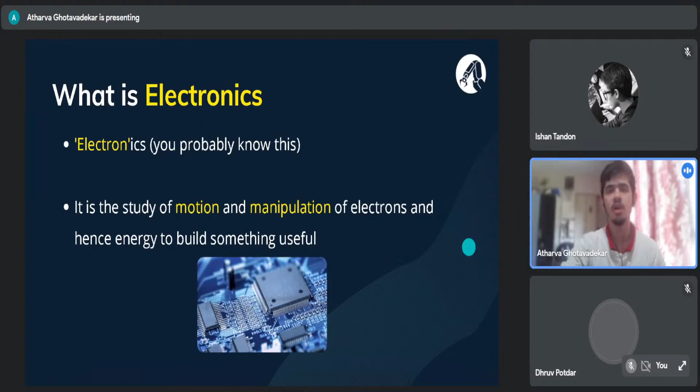Now an even more important question: why does it matter? Why do we care about electronics, or why is everyone talking about it? There are two main reasons I feel. The first is that a lot of the energy we use today is in the form of electricity. A few thousand years ago, when there was no electricity available to man, things were more mechanical. Systems were based on mechanisms, and energy sources might have been fire, or even animals or labor. But in today's world, the major source of energy is electricity, and in order to manipulate and use that in a good way, you need to have an understanding of electronics.

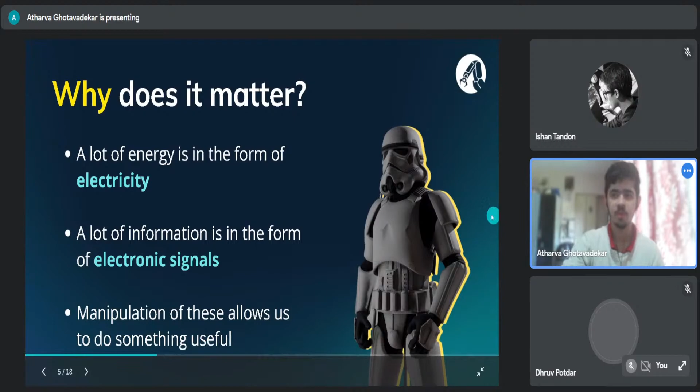Similarly, we are living in the age of the internet, in what we call the digital age, because most of our information, most of our data, is in the form of some or the other electronic signals. When things are stored in your computer, in your memory, that is nothing but variations in signals that we have given meaning to, and we interpret them as whatever information we want. So these are the two main reasons why electronics really matters in today's world, and that's why studying it and getting into it will help you build something useful. It's important to think about that as you approach this, because if you know why you're doing something, you're much more likely to be interested, and it's going to be a much easier ride for you.

Okay, so we'll start with a very small, basic example. You don't need to know the details about all of this. We'll just go through it to understand what levels electronics is involved in.

Let's say you have a temperature sensor based heater, a mechanism where you want to maintain the temperature of your room. For that you need two things. First, something that will measure the temperature, because you want to maintain it at a certain level. Second, a mechanism that can give an input to the environment such that the temperature can be varied, something that will heat up or cool down the environment.

As you can see in this diagram, you'll take in an input from the environment in the form of heat transfer, because whenever there's a gradient of temperature, there's a flow of heat across it. So there'll be heat transfer into a sensor, which tells you what the ambient temperature is. Then you feed that information into a circuit, process it using some technique, and that processed information gives you an output, which is what you need by reading the temperature, since you want to maintain it at a certain level.

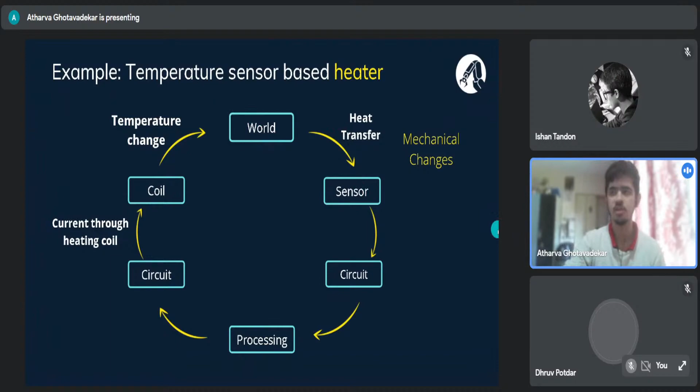Let's look at this in more detail. Let's think about what this sensor might be doing. You have a change in temperature, and there's going to be some mechanical change in the sensor, for example a change in resistance. I'm making this example based on what you've learned in 11th and 12th, so it's not too complicated. Real sensors might not work exactly this way, but this is just to give you an idea of the thinking approach.

There will be a change in resistance due to an increase or decrease in temperature, because of heat transfer. Then there will be a variation in the voltage across that resistor, which you can measure and give out as an output current to your circuit, which will then change how much current goes into the coil. So we started with a mechanical change, converted it into an electrical signal, used our knowledge of electronics to process it, and then produced another mechanical change eventually.

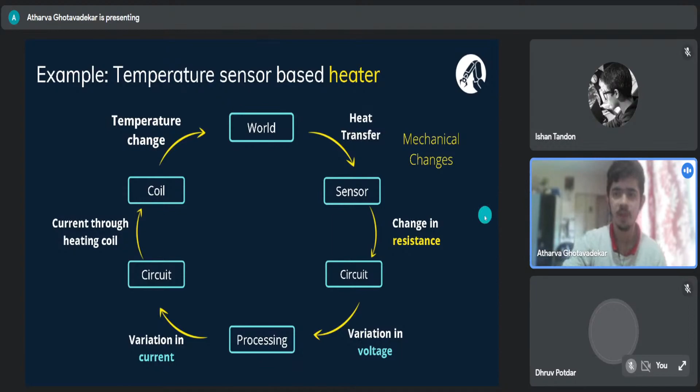So that's just an overview. Now the next important question is where does ERC come into this? Obviously ERC doesn't make heaters, but the work is mostly divided into three domains, which you might have heard of from seniors or if you're interested in general: analog electronics, digital electronics, and PCB design.

Electronics is much more than just these three domains, but because we are the electronics and robotics club, we don't focus on exactly how a particular electronic device works internally, although that's also part of the core of electronics. What we do is take constructed electronic devices and use them in our applications and robots so we can achieve something useful. So these are just the three domains ERC works in, a subset of the entire electronics domain.

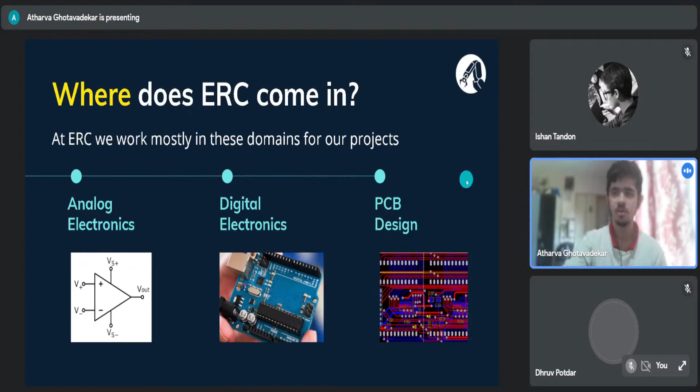We'll quickly go over each one. Analog electronics, you must have heard this word. Basically, these are systems that deal with continuous signals. We all know an analog watch as against a digital watch, the second hand in an analog watch usually moves continuously and smoothly, it doesn't stop at every 1 second. Technically it's taking the value of every second between 0 and 60, not stopping discretely at any point.

Similarly, when you have continuous signals, that is basically analog electronics. And majorly the use cases of this are in sensors and applications that have to do with audio and radios. So let's just go over a few.

I'm trying to just introduce you to the names of a few of these. It's obviously all right if you're not aware of any of these, because even in my first year I was seeing these terms for the first time. This is just to get you an overview of what all is there and what all you can explore.

A very crucial part of analog electronics is what is called an operational amplifier, which can take in an input as a current or a voltage and then amplify or scale it to output a value of whatever voltage or current you require. You'll learn about this in your second year if you are under the EEE department, but even if you are interested in electronics, operational amplifiers are one of the most heavily used devices.

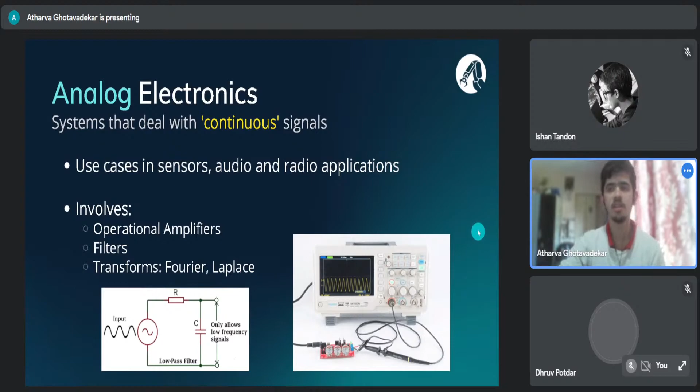So that was about analog electronics. Next up is digital electronics. Again, we'll use the same example as the watch - like a digital watch that shows you discrete seconds. The watch is going to stop at 1 second, then at 2 seconds, then at 3 seconds. You'll never find it at 2.5 seconds.

That is basically digital, where you have discrete signals. You have specified levels from which you transition directly - you don't stop in between those levels, your signals transition between them directly. And then the very common notion of binary and usage of zeros and ones, upon which digital electronics heavily relies, is basically you have a high voltage or a low voltage, and those are the only two values in which your device operates.

Another rather important part of digital electronics that ERC mainly works in is microcontroller programming. You might have heard of this board, known as an Arduino board. Many people who are starting out in electronics usually start their projects using an Arduino board. That's basically a very small computer on a single chip.

As you can see here, this black chip, that's an integrated circuit - it is the Atmega IC, and that has processing power to a very small scale compared to your computer, but it has stuff like a CPU. It has input and output pins - the black headers you're seeing here are the pins which you can use to input and output signals. It has some memory, it has processing, and it's basically an extremely small version of a computer. For certain small scale applications, these microcontrollers are very useful.

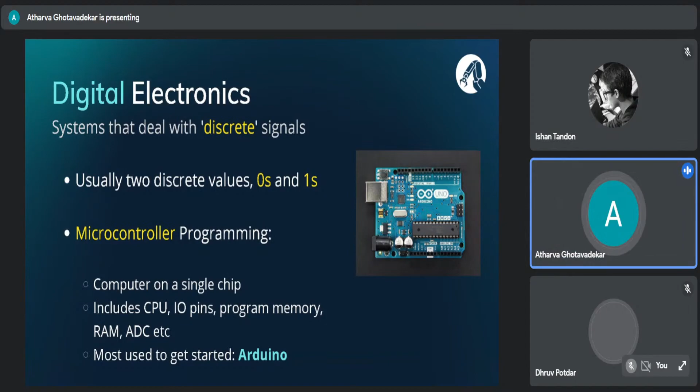Next up is PCB design. PCB stands for printed circuit board - maybe some of you have heard of this before. What a PCB does is basically allow you to have different elements on your circuit. You have different devices, different connections, connections to different sensors. Let's say you have some motors - something that brings about a change in your environment, that is called an actuator.

So basically you have different connections, and you want to get all of them on one piece in a compact way, in the most efficient way possible, so that you reduce size as well as costs. So that is where PCB designing comes in.

So you have fabrication labs, you have PCB manufacturers where you can send your designs, and then you'll get a board printed.

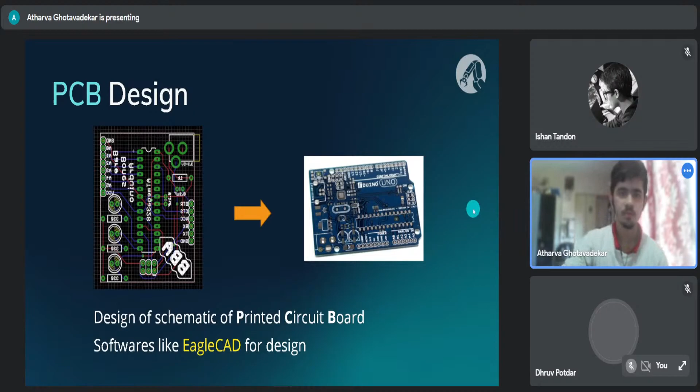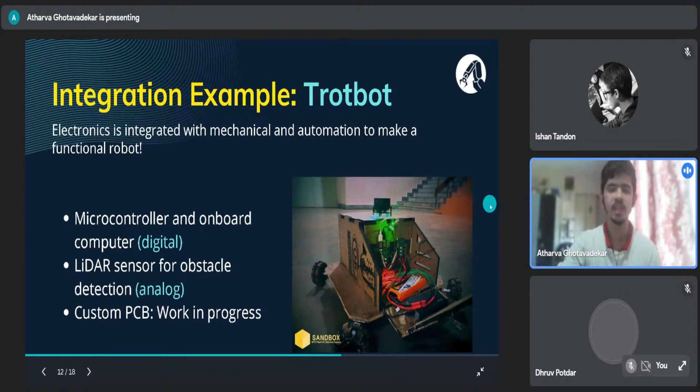And as you can see here, this is an old picture. So here you can see two, three things are mounted, right? So we're working on a custom PCB to integrate all of this. This is the battery, this is a power bank. So we're trying to integrate all of this into one single PCB, and we will soon be sending that to manufacturing. So work on that is currently going on.

Okay, so that was quite a long thing, and it might feel like too much information. And the reason for that is quite a lot of this might be new for you at this point, and that's completely fine, because you're in first year. Even for me, all of this I've learned over the course of the last 1.5 years.

So then what do you do, right? So if any of this seems even remotely interesting to you, then ERC is just the place to be. You can start exploring. We have a lot of opportunities coming up at ERC.

We'll go over how you can get started. So we have a thing which is called the ERC handbook, which is an extensive collection of resources across all domains related to robotics. You can have a look at that. It has a roadmap about how to get started. It gives you descriptions of things, and also gives you links to a wide number of resources. So you can go and check it out.

Another source can be QSTP materials. So QSTP is Quark Summer Technical Projects. You'll get introduced to this after your first year during the summer break, if you have it this time. It's basically an initiative by Quark, and we usually have 2 or 3 QSTPs every year from ERC. One of them is mechatronics. So there are also resources linked here, you can have a look at them.

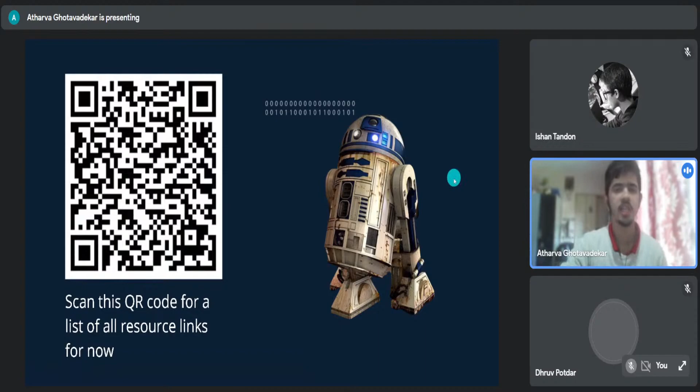Okay, so FAQs. I'm sure these questions might be going through a lot of your minds, and that's because even I was a firstie one year ago, so I had all of these questions as well.

Let's say you have not worked with electronics before - is that okay? That is perfectly fine, because most of us have not worked on something big before coming to college, and that is why we are in college now. This is the place where you can get started, you can explore, and ERC is a great place to start that.

Then, is electronics difficult? I feel that this is an opinion and not information, so it's subjective. I'll definitely say that it is vast. Electronics is vast, it has a lot of domains, it has a lot of depth, and you'll really need to understand stuff if you want to make something. But at the same time, that journey is extremely interesting and very rewarding. So if you have any assumptions that electronics is difficult, or if people have told you that, it's best to decide for yourself. Don't go with any biases in your mind that it's difficult or something like that.

Another thing is, I don't know any programming language, so what do I start with? If you're interested in electronics, the best thing to start with would be C or C++, because Arduinos and some microcontrollers are coded using C++, and even a knowledge of C is enough for that. That is basically what you can start with. We'll also attach a link to the resources for learning that in the sheet we mentioned.

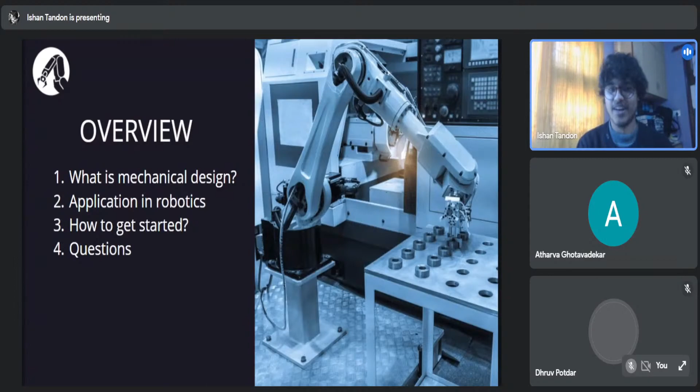First up, we have the overview: what is mechanical design, how is it related to robotics, and how to get started. In terms of mechanical design, specifically for robotics, you'll be dealing with the physical makeup of the robot, how it looks, what shape it has, what features it has, and stuff like that.

Then another thing would be material selection, which is also really important. It depends upon how you want to manufacture things. If you want to 3D print, what type of material would you use, and stuff like that.

Next would be joints. Whenever we have a robot, let's say a robotic arm, we always have joints between two links - like your shoulder and elbow joint. So what type of joints do we use? What are speed reducers, and what type of motors do we combine with these joints to get the required motion?

Next would be kinematics and mechanisms, where we look at - I'll give more details later during this presentation about that. Next we have testing and manufacturing.

I would argue that manufacturing is the most exciting part of the whole process, where you actually get to feel in your hand what you've manufactured and see it work in real life. But testing, which comes before that, is really important as well, because the last thing we want is to design something groundbreaking that we can't actually manufacture in real life. So it's important to look at testing and manufacturing in a lot of detail.

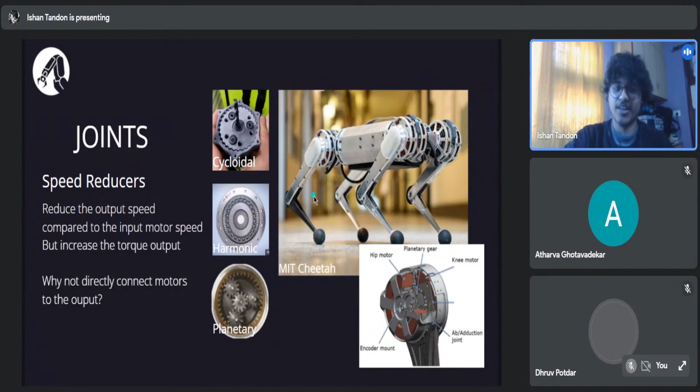If you want to look at the details of these things, we'll provide resources at the end, so you don't need to worry about how they work at the moment. All you need to know is what they do.

On the other hand, steppers are a special kind of motor that, instead of rotating at constant velocity, move in steps. This is very useful in certain scenarios, so if you want very precise stepping motion, steppers can give you that.

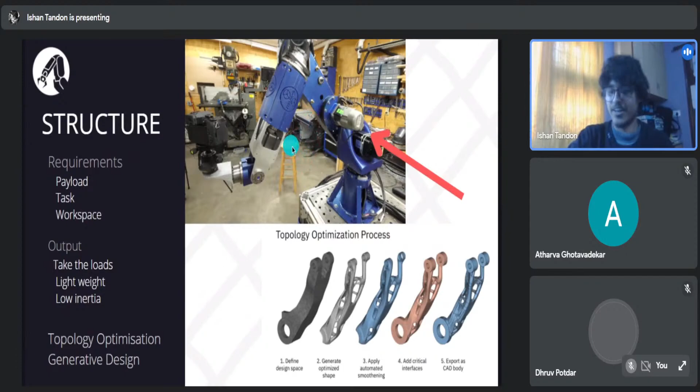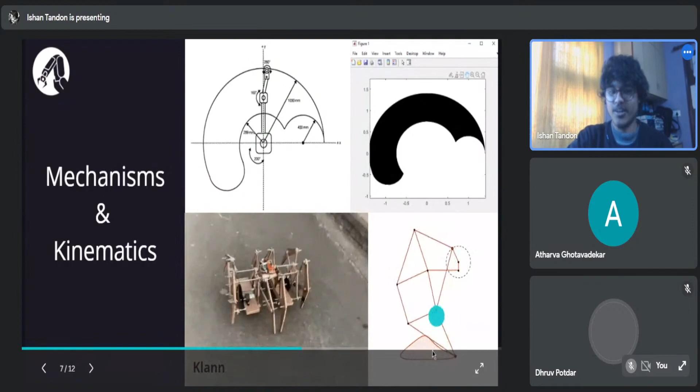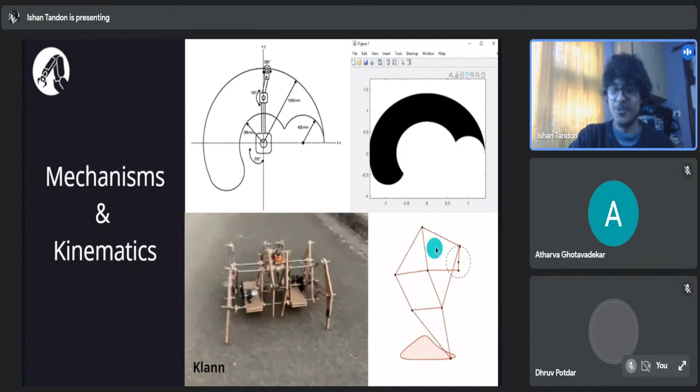If you follow this last point, you can see the underside is almost flat, while the upper side motion doesn't matter. Because the underside is flat, this can mimic a walking motion—when you walk, your leg stays flat on the ground and moves back. If we put, say, eight of these Klann mechanisms on a robot and drive them together but out of phase, we'll always have one foot on the ground, helping us walk forward. This is an example of a very simple robot we made using kinematics.

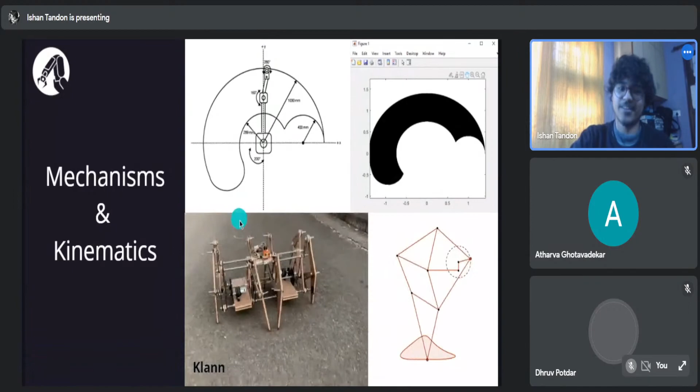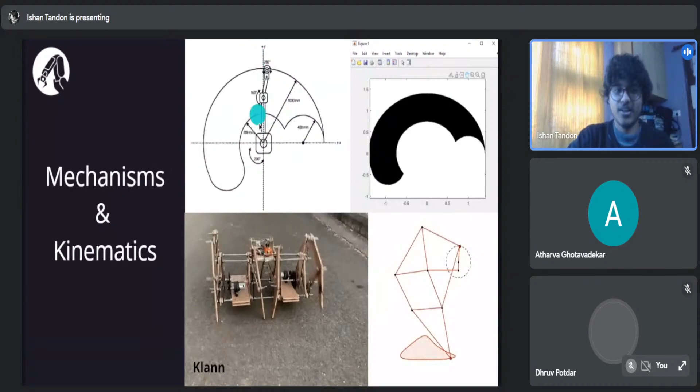On top, we have an example of what a workspace looks like. As I mentioned earlier, a workspace is the region which the robot can actually cover. In this example we have link one and link two, with the end effector placed at the second link's end. When we look at all possible positions of this end effector, we get a shape something like this.

On the right hand side, we have a MATLAB program we wrote to figure out what the shape would be if we specify the length and constraints of the whole kinematic mechanism.

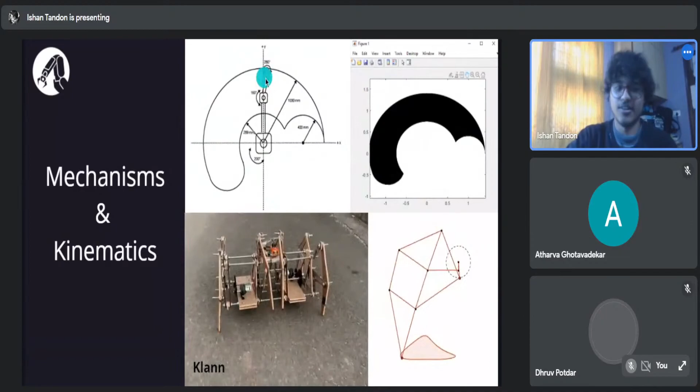Next up we have wheels. I'll give you an example of caster wheels first. Caster wheels are wheels which are not powered—just idler wheels we place in situations where we want to support some weight and also move in all directions.

Let's say you have a robot with two wheels in front, but the back is dragging on the ground. We can add a caster wheel at the back to support the weight while letting it move in all directions. What's special about caster wheels is that the wheel is offset from the vertical axis—like in shopping carts, where whatever direction you start to move, the wheels align with that direction due to unbalanced forces and torques. This is useful when you just want to add some idler wheel.

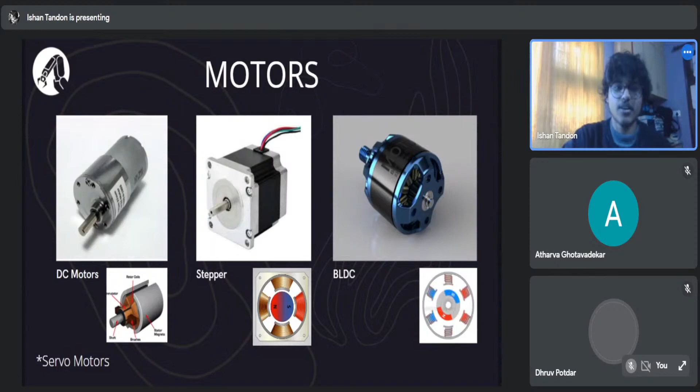What does sandbox mean? Sandbox is the fabrication lab that we have, with a few facilities available there. Let's say you're manufacturing a drone and want to make the frame, you'll go to the Sandbox Lab and use the laser cutters, or if you want metal, you might go to the workshop. If you have a project and want to 3D print something, once you get approval, you'll get access to the 3D printing tools there, and get the filament from there as well. We also have a lot of mechanical tools, screwdrivers, wrenches, and a variety of things. So whenever you want to manufacture something, Sandbox is probably where you'll go.

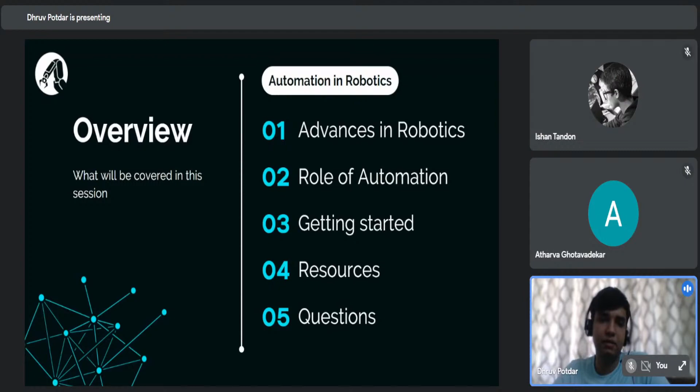Let's talk about some recent advances in robotics. In the past few decades, robots have become more efficient and capable. We used to have basic robotic arms controlled by remotes and radio software, but nowadays these are pretty much automated and can build products as complex as a car part.

Sometimes they even do heart surgeries. Nowadays we have Roombas which can navigate and clean entire houses on their own. We have drones which previously had to be flown around manually using remote control, but now they can follow you around and perform complex aerial acrobatics on their own. Robots have become more reliable and precise, and all of this is given to us by automation.

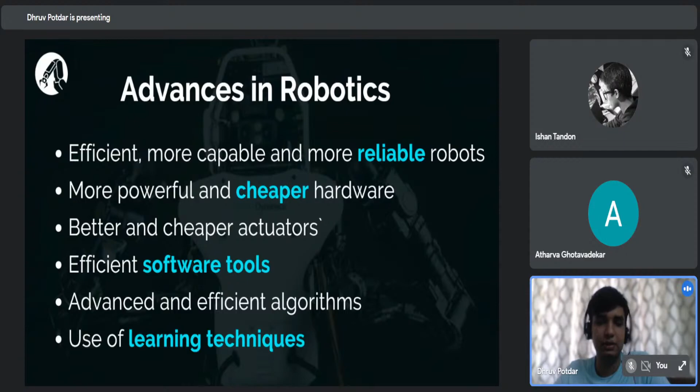So how does automation come into robotics? In the last two sessions, you learned about mechanical and electronics. If you think about a robot as a human being, the mechanical and electronics part form the body of the robot, and automation forms the brain. It makes the robot sense its surroundings, navigate, and perform tasks in an environment, all using a very simple set of instructions and a CPU.

Automation also helps in making the robot less dependent on human control, which is something that is very important nowadays because of issues I will speak of in the future. Automation has three subdivisions: perception, control, and planning.

Let's start with perception. Humans experience their surroundings using their sense organs. The stimuli we get using our eyes, nose, and ears gives us a general idea of our surrounding and helps us find ourselves in our surroundings and get a general idea of where other objects are located. You can think of this as a map, giving you a complete idea of everything in your surroundings. A robot does the same using sensors such as LiDARs, IMUs, and cameras, which allow it to 'see' its environment and give it a map of the surroundings.

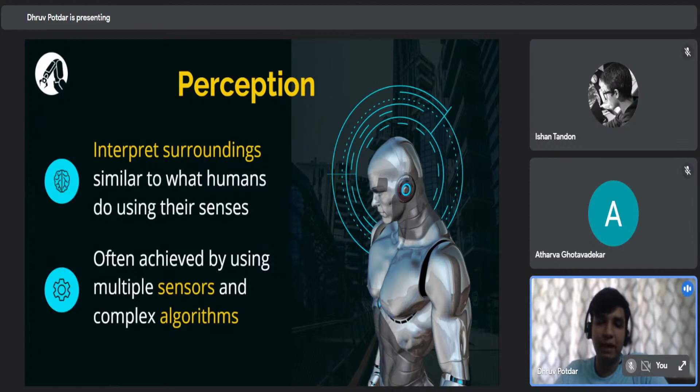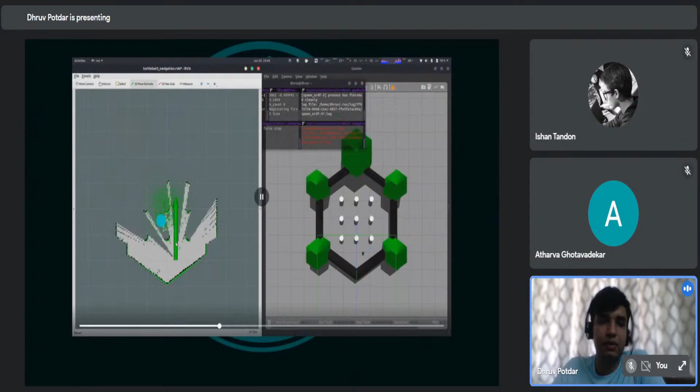So here we have a simulation that we have built up for you. It's a simulation of a very famous algorithm known as GMapping. As you can see, here is a simulation, and on the left side is what the robot sees. The small green dots you can see are where the algorithm thinks the robot is, and on the right you can see where the robot actually is. This is all done using a simulator called Gazebo and RViz.

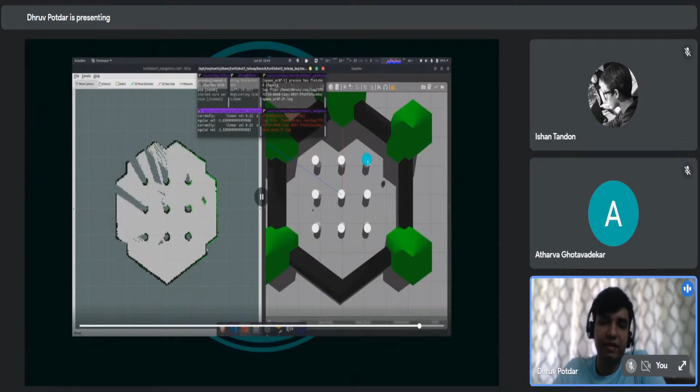As you see, as the robot moves around, it starts to see different parts, which are signified by the grayed out areas. On the left side, you can see the pillars, which are slowly becoming visible as the robot comes near them.

So now let's talk about planning. Planning is finding a feasible path from one state to another in an environment. It is basically the robot deciding where it should go and how it should go there. It is a set of very complex algorithms which are usually used to make robots navigate in their environments.

Often, as a test, we use them to navigate a maze. Planning is not limited to maze navigation, though. In advanced robots, one must decide what actions to perform and the order in which one must do them, which also comes under planning.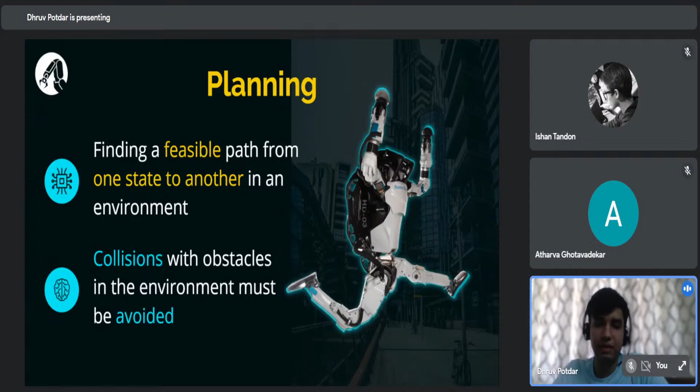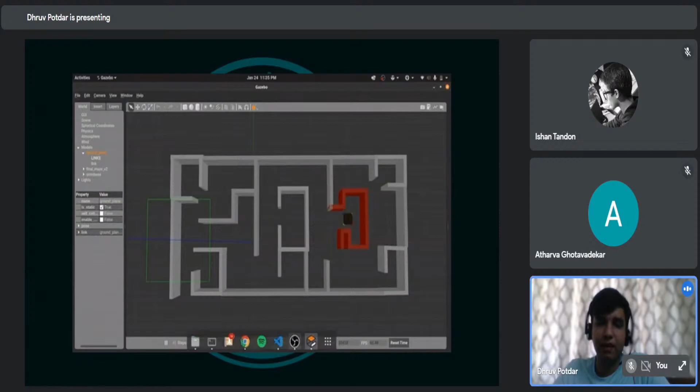Next, we have controls. So now that the robot has seen its environment and has its path planned out, we need to execute that path. This is where controls come in.

Most of the sensors and algorithms used in robots are not absolute. They have some sort of error associated with them. For example, if you imagine a car driving on a road, because of some issue the car might drift to one side, or it might change its speed. To correct for these errors, we employ different controllers which take into account the current state of the system, the destination of the system, and change the inputs to make sure the robot or system is going in its desired direction. In the car example, this would be the human who will steer the car accordingly.

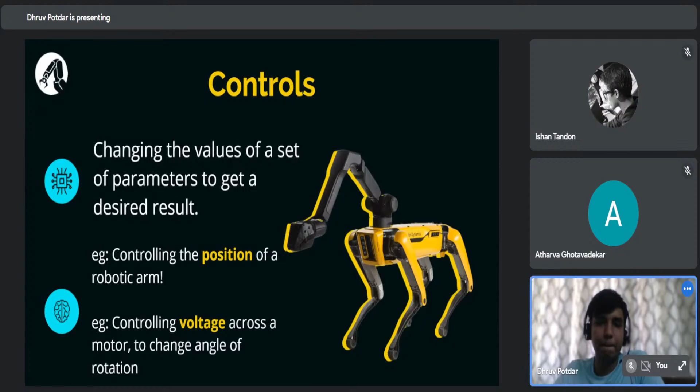So let's talk about how to get started with automation. For everyone starting robotics who doesn't have any experience with coding, I would suggest that you start learning Python. It's a very basic language and is a great starter for new people. Then the next step would obviously be choosing a domain from the three I just talked about: controls, perception, and planning. And the next step, which is the most important, do a Google search. Doing a Google search is the best and easiest way to find any information that you want, and it is the most convenient place.

So let's talk about some advanced skills that we use here in ERC that you saw in the previous slides. For programming languages, we have C, C++, Python, and often MATLAB and Simulink. For the OS and development tools, while most people use Windows, robotics tasks need to be done on Linux for reasons which I'll explain. So Linux and the terminal.

The terminal is a very important tool that, instead of being graphical, gives you a list of everything that is happening. And that is very great when you want to debug or make some changes in your robot.

Next thing, Git. Git is used for version control. When you work with multiple people and collaborate on tasks, it is very difficult to keep track of what this guy did and what that guy did and what the other guy did. So Git is used for that, as it gives you a visual depiction of the tree, like a depiction of the inputs and outputs provided by the different users.

For the next thing, we have some software that we use: ROS, which stands for Robot Operating System, and Gazebo. In the last few slides, you saw a few simulations that we had done on ROS - the maze navigation one, and the perception one. These were all done using ROS, and ROS provides us a suitable backend that can help us in organizing our tasks and provides an interface for you to link your software and hardware.

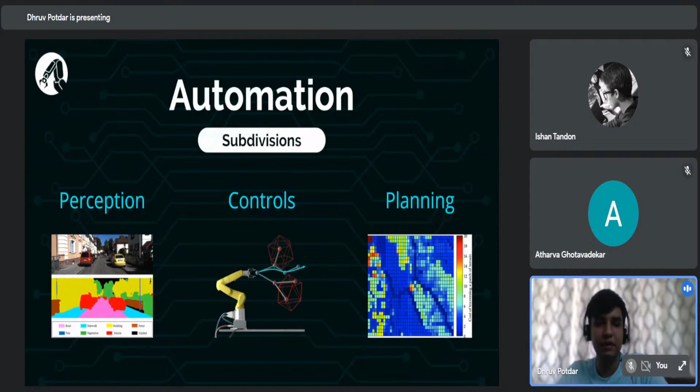Another alternative to doing a dual boot is using WSL, which is a simple application you can download using the Windows Store. Some of you can check it right now. It's basically just a command line that is inbuilt into your Windows, with a very simple interface, but it is less recommended for robotics use cases because it does not have some GUIs that we might need.

So for Mac people, I don't know if you can dual boot using your Mac, but you obviously have the option of using a virtual machine. Not sure if dual booting is possible.

Is it advisable to try VS Code for coding? So VS Code is just an IDE for all practical purposes. You might as well code on the default text editor, it doesn't matter. But obviously VS Code has some perks and features such as extensions and support for various languages that help us. So yeah, VS Code is a good way to start.